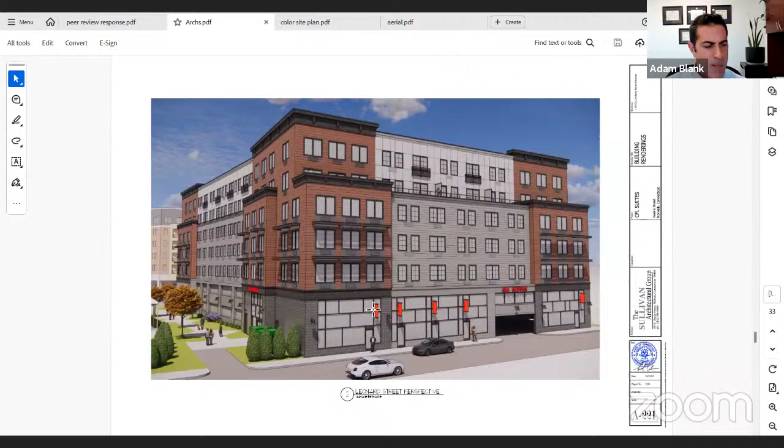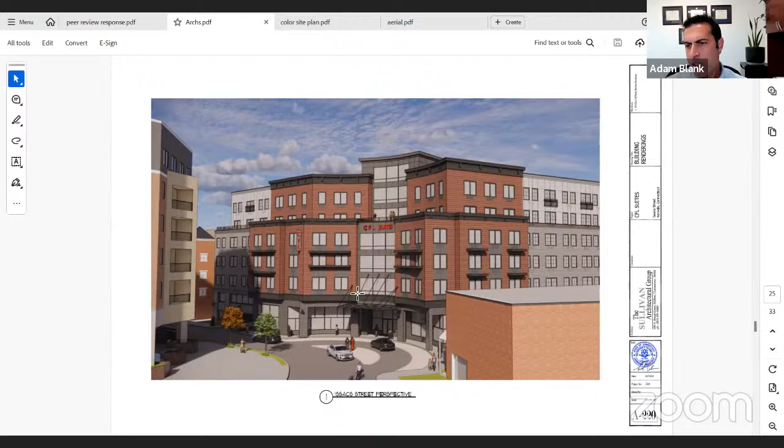As you've noted previously, Norwalk is short on hotels, so this fills a general need. The building itself is proposed with a fairly few amount of amenities, with the idea being to get guests out into the neighborhood, supporting local businesses, which we think is great for the neighborhood in general. And Mr. Milligan has interest in other properties along the area that hopefully this will help support, getting his other tenants out to those restaurants and retailers.

We think it's a significant improvement for the neighborhood. As I mentioned, the existing site is pretty much entirely asphalt, impervious, not a lot of green. It will be increased from about 0.5% pervious currently to about 20% after we're done, including about 36 drainage galleries for water retention and stormwater treatment that currently don't exist. The structure proposed would be LEED Silver certifiable, with a whole bunch of other sustainability improvements proposed for the site.

With the addition, of course, new landscaping will come around the sides of the building on this side and down here.

We're in the CD4 for planning and zoning. It's a site plan - these are all permitted as of right uses under the zoning regulations. So your role in the process is limited, but important, and that's to determine whether what's being proposed complies with your design review guidelines. They really are your guidelines, and they have some flexibility for you.

You've retained Bob - I'll say Bob G, because I butcher his last name every time - from DeCarlo and Doll to do a peer review on the architecturals for compliance. We started working with Bob, and really with planning and zoning and with redevelopment, almost 4 months ago on this project. There've been quite a bit of back and forth, and our original plans were modified fairly substantially along the way, based on feedback we received about design review standards, zoning compliance, and architectural preference.

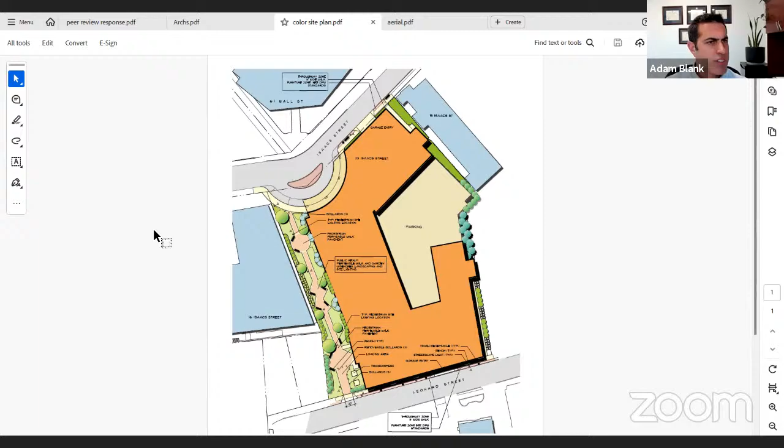With that, let me stop sharing. I'll have Ray take 2 or 3 minutes to show the architectural plans, and then if it's okay with you all, we'll pull up our response to Bob's review and run through the handful of items that remain outstanding. But if you have other questions or concerns that either I haven't addressed yet or that Ray doesn't address, please shout them out at any time.

With that, Ray - okay, thanks. So I'm going to share my screen. Hopefully everybody can see that now. What I'd like to do is briefly discuss the concept of the plan, how the building design and the site plan evolved.

When Jason first came to me and we looked at the property, I felt that Isaacs Street was a little tired, a secondary street - there wasn't a lot of definition to it. My initial reaction was I wanted to create a sense of arrival there. If you pull down Isaacs Street, I wanted you to be able to get to this building and feel like you got somewhere, like you arrived.

So we actually envisioned a roundabout here, but the only thing we can control is our own property. So we've got ourselves kind of a three-quarter roundabout on Isaacs Street, in which case we can turn around and go back out. We've got drop-off areas for the extended stay.

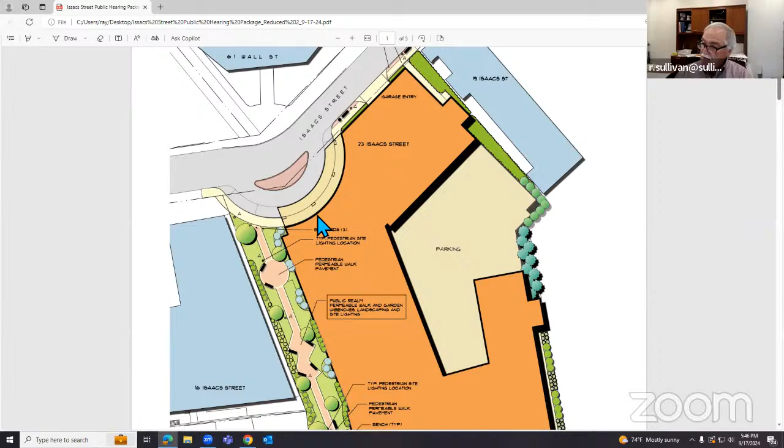Thanks, Adam. So as we turn to the elevations, if we look at the Isaacs Street elevation, this shape helped create our building frontage. Here's the main building frontage with the main entrance and the partial roundabout. The main entrance we saw as the focal point - it was the front of the building, and it was reflective of the curve.

The focal point actually aligns with an existing areaway that walks out between 61 Wall Street and the theater to get out to Wall Street. We have visions of how that works in the future too. The elevators in the building are positioned so that every time the door opens, you look out these stacked lobbies, out that vista way, towards Wall Street and towards Norwalk.

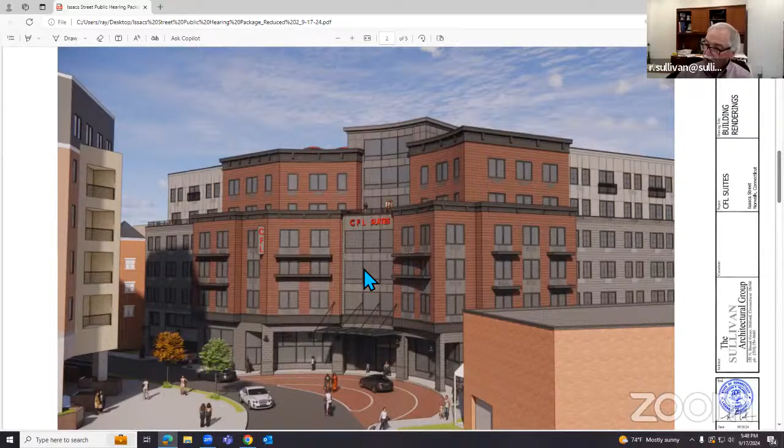I think this curved shape helped define the building, helped define the basic design, and enhances Jason's view of really wanting to pull Norwalk together down here. He's got other properties he'd like to see developed. There's a lot of activity coming online down here, and we saw this as creating a nice sense of place, a focal point back on this somewhat secondary street.

The westerly elevation and plan is formed by this public amenity space. This public amenity area exceeds 26 feet in width, and it's filled with paver walkway, landscaping, benches, and lighting. It really creates a nice sense of space here, and allows 16 Isaacs to maintain a frontage.

Typically, we didn't need to build this curve up here - we could have come across and right down the property line here. But again, as neighbors, we didn't think that was the right thing to do. I would never put the building all the way to the property line anyway. If I did anything, I would have held it 10 feet back, so we can create proper light and ventilation up in the building, which needs to be a certain distance off the property line. But in the end, Jason saw this as being the right thing to do for the neighborhood. It creates this really nice exterior space for the users of 23 Isaacs Street as well as for the public.

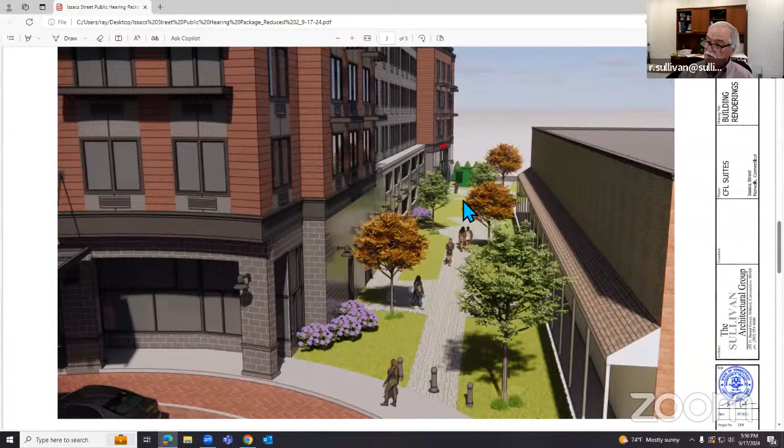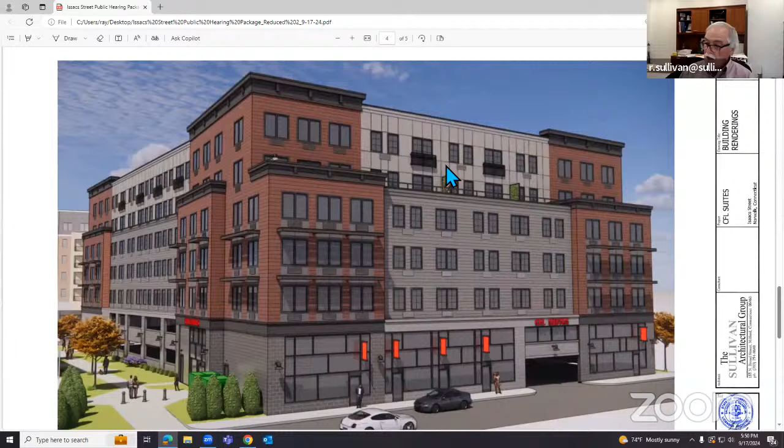So quickly, the Leonard Street elevation - it creates, with the live workspaces, street front activity, and brings the building right to the street.

This elevation is a little bit simpler than the other because it's a straight line, and we've got these more contemporary, deeper colored bookends framing the center of the building, which is slightly less colored, a little less contemporary, trying to create a separate look on the building.

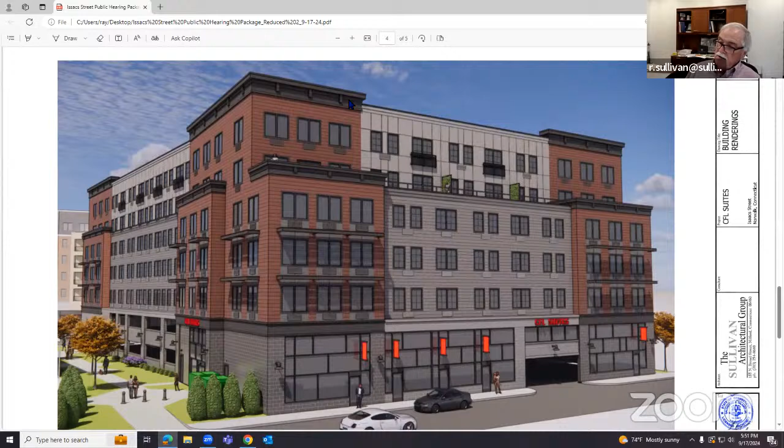We also create access into the parking garage back here. The other noteworthy point is that this southwest corner is actually what we feel is a nice, dynamic shape.

It's a piece of the building you'll be able to see from vantage points driving down West Avenue. You won't see the whole thing all the time, but when you drive down West Avenue and go between pockets of buildings, you'll see that shape back there. We're hopeful it creates interest and draws people back to this area.

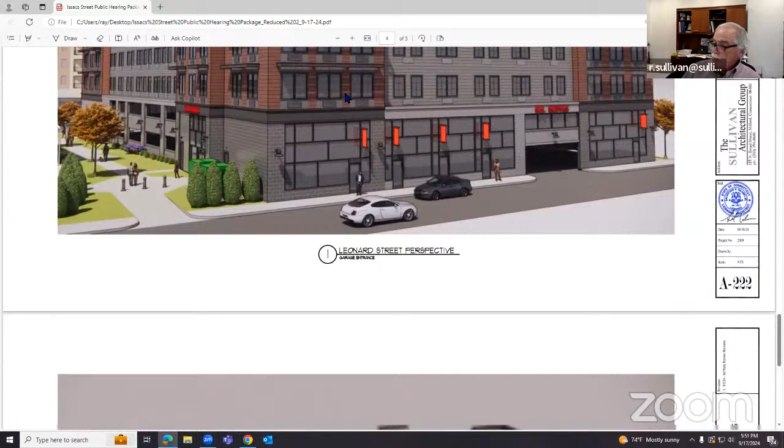Here's the aerial view with the partial turnaround and the public realm. Leonard Street is back here. We have a substantial number of solar panels on the roof, and a rooftop amenity area for the building users. As required, from the fourth floor up, the building steps back 10 feet, both along here and back on Leonard Street.

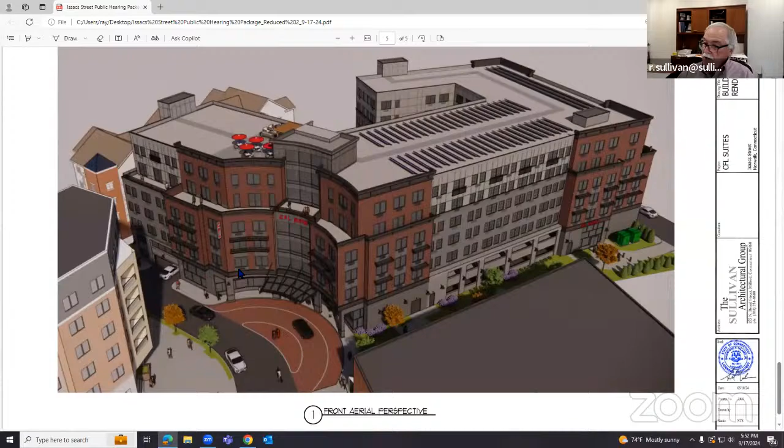The building has 5 residential floors with 42 units on each floor. Maybe I'll just go to a floor plan that might make it a little easier to understand this.

Here's the typical floor plan. There are 42 units on each floor. About half of them, down to unit 224, are smaller units averaging between 425 and 475 square feet. From unit 225 back to 242, they tend to be larger, ranging as low as 675 square feet all the way up to 960, with maybe one odd size a little bigger than that.

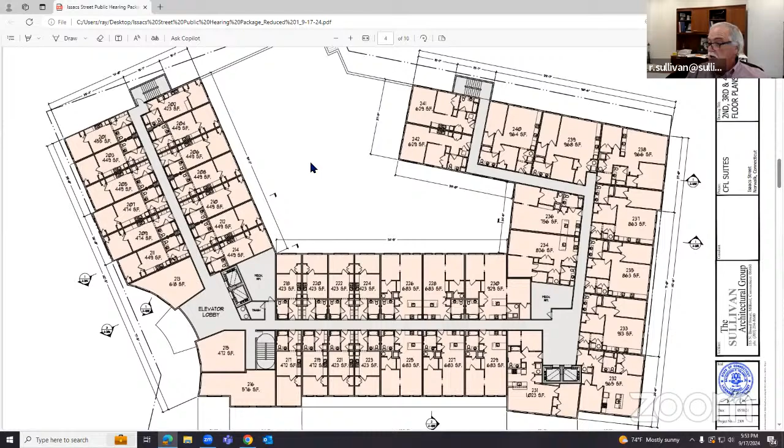For parking, there are 2 levels with 163 parking spaces in the garage, plus 4 outside. So that, by way of brief overview, is the building.

Here are the setbacks. Should I turn it back to you, or do we want to go deeper into it? No, unless the commissioners want to hear more about the layouts, but let's turn it back over and hit a few of the points Bob raised, since he hasn't presented yet.

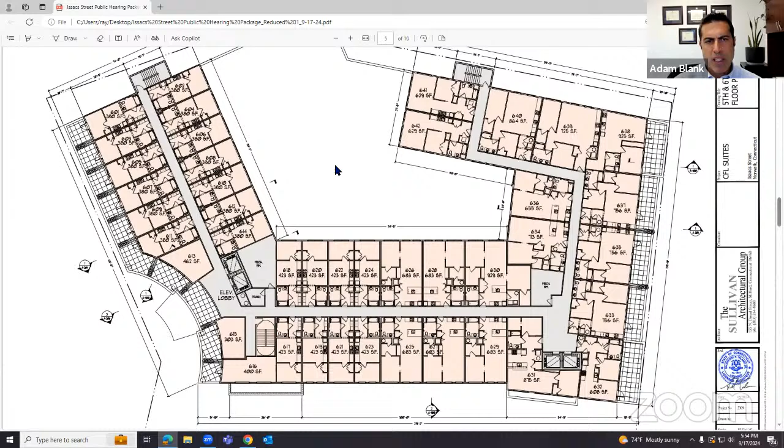Okay, I can share my screen and go through the issues that he's raised. Is that okay, Mr. Chairman? It is. Okay.

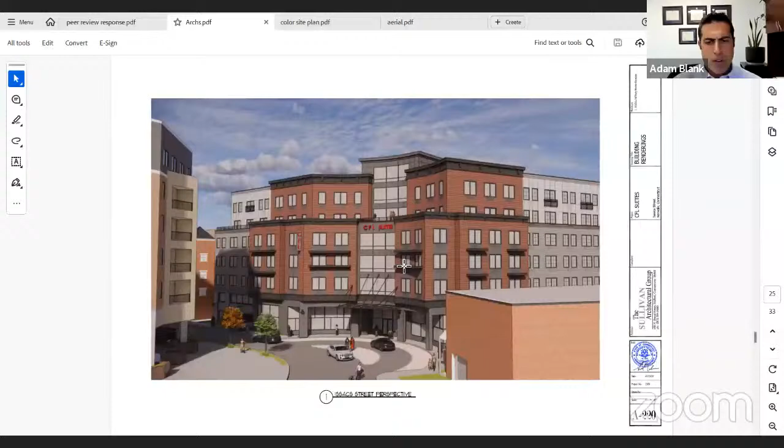I have one question. The building next to you, across from that walkway, I believe that's Audiotronics, is it not? Yes. And their frontage will be on the walkway? Let me try to find a better view. Yes, their frontage is on the walkway. They've got a covered walkway along the front. And where is parking for them, will it be behind your building?

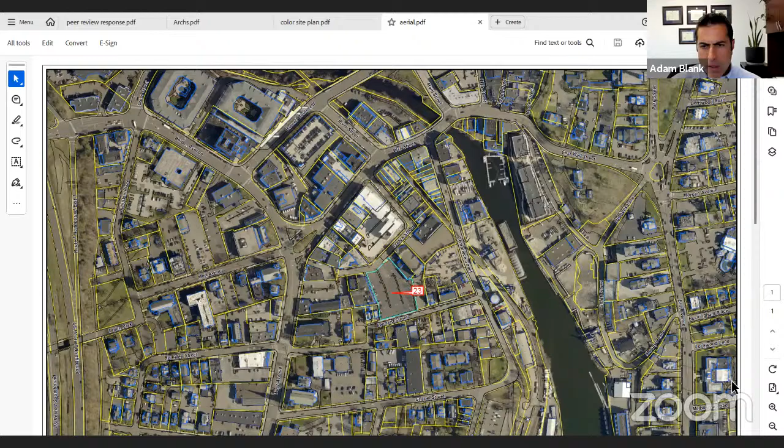Let's zoom in from here. So the parking, that's not actually their frontage. Their frontage is on Isaacs. This is the building's frontage. Their frontage is here, and they've got some loading and spaces back here. I don't know how the leases spell out what gets used for whom, but this is their area essentially back here. To the extent we have public parking here, or other places for public parking, that's where they can park.

The underground parking is there as well. Yep, they're back here. Okay.

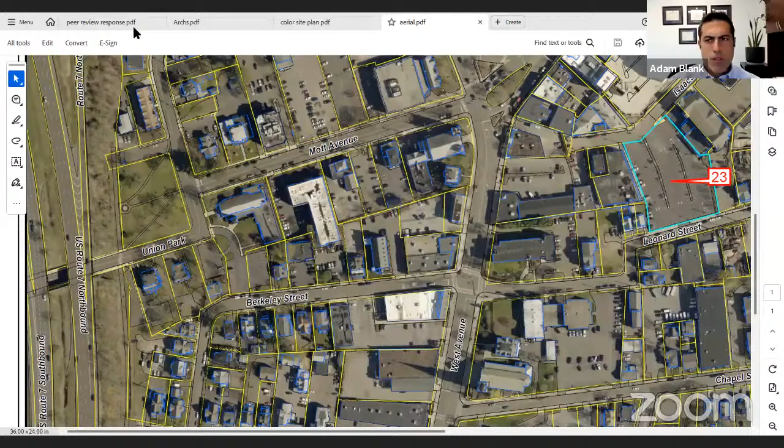All right, let me just pull this up. I'm going to try to hit a few of these points. The peer reviewer asked if we could locate the building entry piers inboard of the inside curb edge and align the face of the building above with the outside face of the piers below. Ray, can I stop sharing so you can pull that up and explain why we've done it the way we have?

Sure. So we have this lobby frontage here, a sidewalk, and then piers along here. This face of the building aligns perfectly with the line of the columns. We have a slight projection here and here, slightly less than 2 feet, that go out beyond the column, and the column is actually right on the edge of the curb, so it doesn't interfere with parking. We like the slight projection here and here because it helps accentuate the center of the building.

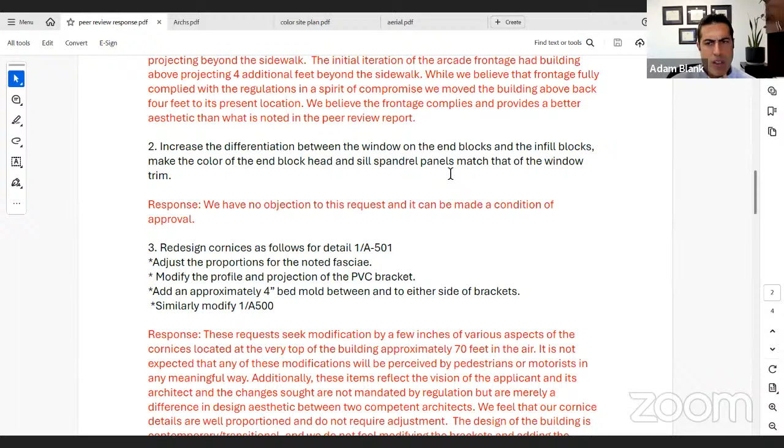So then we were asked to increase the differentiation between the window end blocks and the infill blocks, which we have no objection to doing.

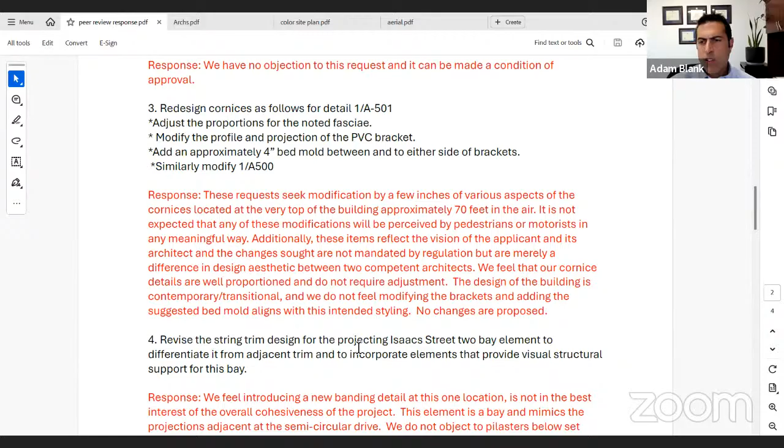Then the next one was redesigning the cornices in a small fashion. So these are up at the top of the building. I'll let Ray pull it up. As Ray's pulling up the cornices, keep in mind that what we're talking about are inches of detail, 70 feet above the ground, and I think they're going to be hard to discern from what's been proposed. But Ray, you want to pull it up and share? Yes.

So your previous comment, Adam, was that Bob had suggested that these infill panels here, in this redwood color theme, be a darker color, and so we've actually changed that. We haven't sent that to Bob yet, but we've made the change per his request.

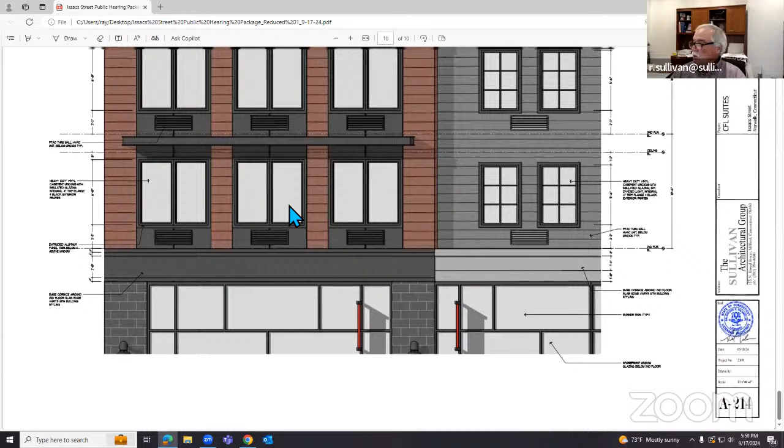And then when we talk about some of the cornices and whatnot, I think we have a fairly healthy cornice up here, made up of bent metal trim, sitting on real trim and brackets. We've had that more demonstrated on the more contemporary edges of the building, and it becomes a little simpler on the simpler sections of the building.

This particular section is actually 4 feet 5 inches tall, so it's pretty substantial. This one's a little less, more like 2 feet 6 inches. Bob had some recommendations about changing dimensions, and possibly adding some molding trims up in here. But we thought that because of the contemporary nature of the design, we'd rather keep it simpler, with straighter and cleaner lines.

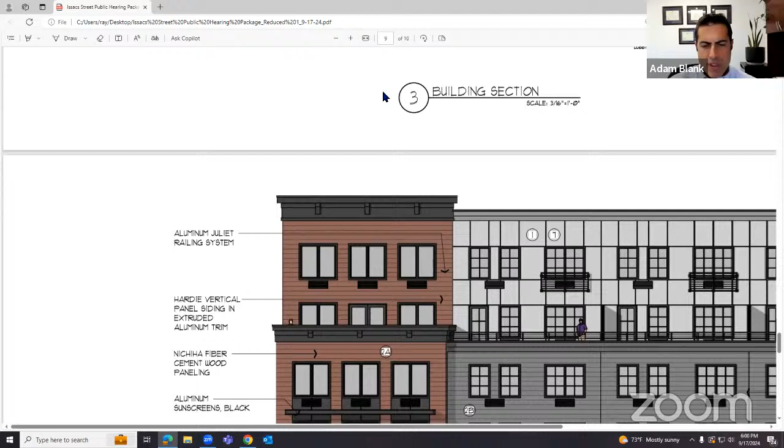Revise the string trim design, projecting the Isaacs Street 2-bay element to differentiate it from adjacent trim. Ray, can you? Yeah, I'm in the process of doing that.

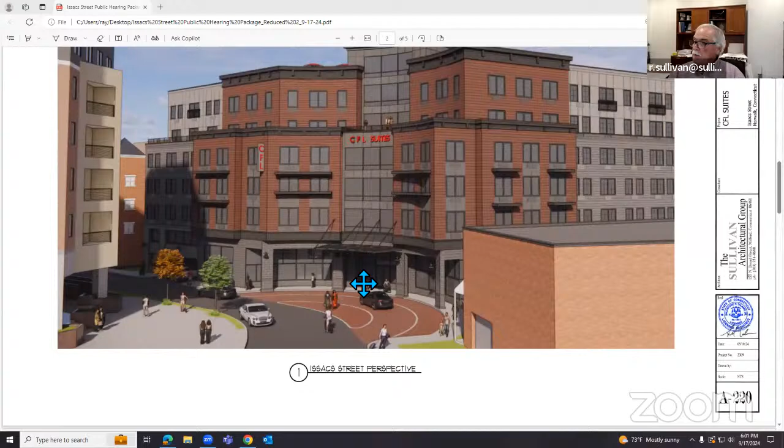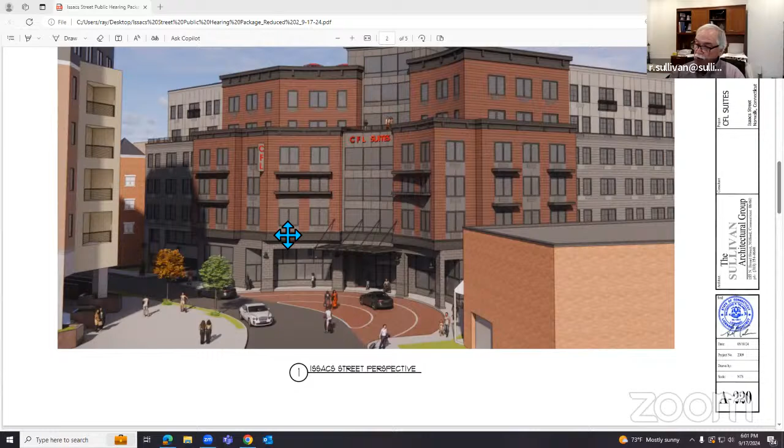So what we find all the way around the building is a pretty definitive line where the first floor meets the second floor, where the fourth floor meets the fifth floor, or where the building meets the parapet roof. That's a pretty significant dimension, a little over 3 feet thick, and we like that. We don't want to break the plane of that band around the building.

There's a fair amount of movement on the building. This projects out, comes back, comes around the curve, works its way down the end of the building. As it goes from the deeper color section to the lighter color section, the band changes a little, but stays in the same plane. Much the way up here we've got this band transition to a smaller, more delicate band here or here. But we do like the band to stay in alignment. That would be our preference.

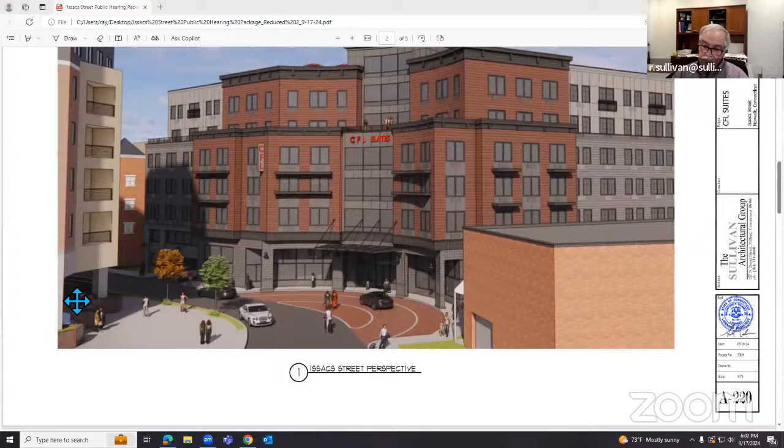The zoning regs, and by the way, some of these that we're running through, it's a joint review between planning and zoning and redevelopment. You've both used Bob as the peer reviewer, so his comments, some relate to zoning concerns and some relate to design review guidelines.

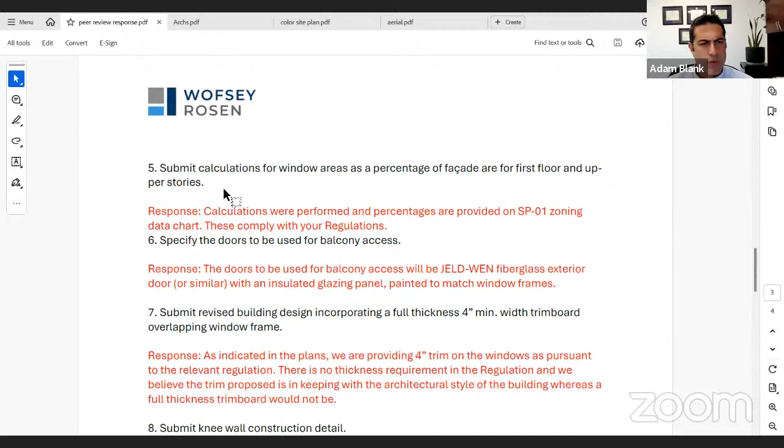One of his concerns was about calculations for window area as a percentage of facade. We did perform those and provide those, and it complies with the zoning regs. He also asked that we specify doors to be used for balcony access. We've now specified the doors or similar that will be used.

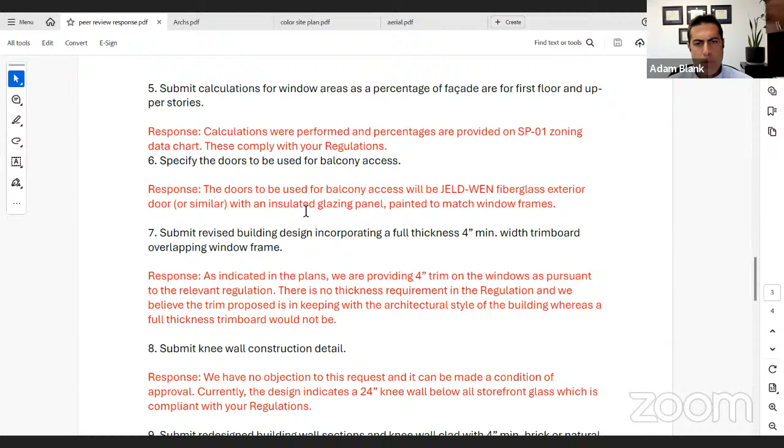Then the next one is submit revised designs incorporating a full thickness 4-inch minimum width trim board overlapping a window frame, and that relates to a zoning regulation that asks for 4-inch trim being provided. So can you, Ray, or Jason, answer this? Yeah, I can take this, at first anyway.

This particular window is in Willard Place, over in Norwalk. It's a heavily reinforced fiberglass window, extremely sturdy.

The extrusion on the sides, top and bottom, are just shy of 3.5 inches. It provides a sturdy frame on the building, which is what the window trim is trying to do. The good part is it's integral. If you put up trim, the joints can move a little and take maintenance, but in this case it's all one product.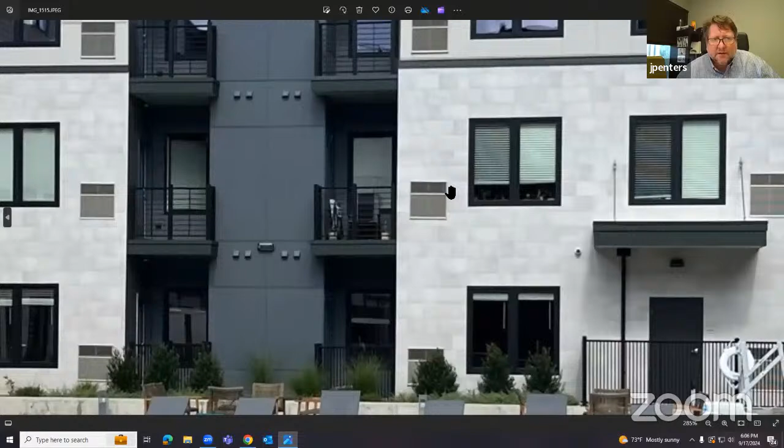Using these, it basically already has a trim, so it's very difficult to say you're going to add another piece of trim around trim that already exists. It's essentially a window, because they're casements, that already comes trimmed. So the regulation becomes very—I don't want to say it wasn't completely thought out, but with this type of window it doesn't really work.

Since we're here and showing this, I'll show the exact language that was raised, dealt with in the design standards, but certainly in the zoning regs, which talks about materials to be used.

One of the materials we're proposing in addition to these windows is porcelain. Do you want to talk, Jason or Ray, about the porcelain we're proposing? I'll quickly talk about it, and Jason is actually maintaining it, so he knows more about it than I do.

In Willard, this is a porcelain tile, the same type of tile we're talking about using. One thing to know about the tile is that it's adhered with a metal mesh and a mortar, so it is securely attached to the substrate. A lot of our building on the lower level, at Isaac Street, is concrete. Some of it's going to be steel stud. It's all going to be non-combustible.

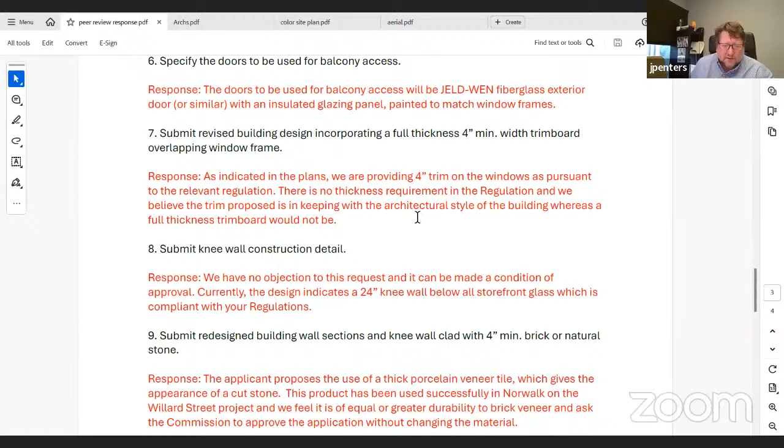Our first thoughts were to use masonry block, some sort of textured block or something, but those blocks are hollow, and if they get hit, it's a big disaster. So when we found this, which is actually imported from Poland, we were just blown away by the product, and we put it everywhere we thought there might be contact.

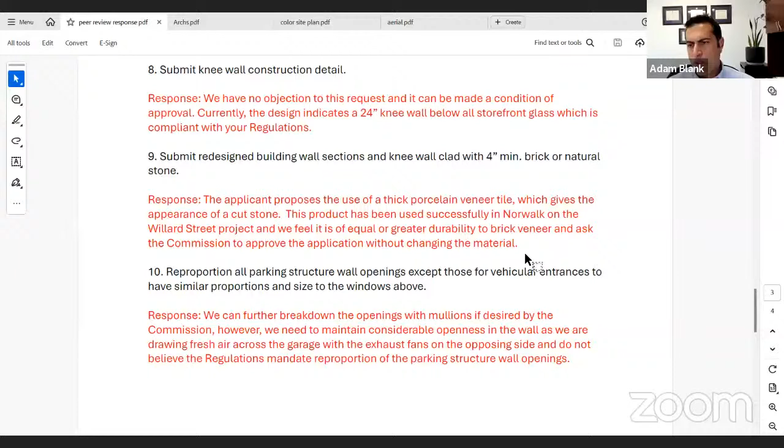All right, so number 8 on here was submit knee wall construction detail, which was fine for us to do. Number 9 was asking for 4-inch brick or natural stone. Again, I think you just heard about the porcelain that we're proposing. 10, and I think there's only a few more coming down the list. 10 was reproportion all parking structure wall openings, except those for vehicular entrances, to have similar proportions and size windows to above.

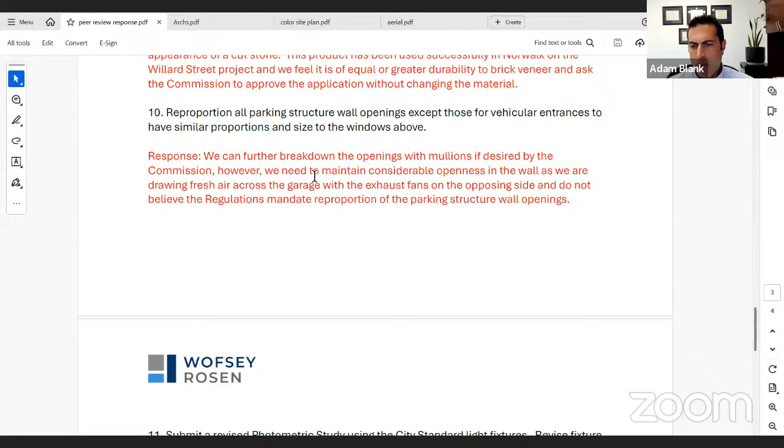Ray, you want to just talk about the entrances for a minute? All parking structure wall openings - oh, that was more about the alignment of the piers and the openings up above. Actually, this is the last one, the rest of them we agree on.

The file's so big, I had to split it up, so I've just gotta. Can I just ask a question while you're doing that?

Is the intent to use the porcelain tile over the entire building, in just different colors, or are there different materials? I couldn't really tell. No, it's just at the base. There's different materials all over the place. You're using brick above? No, actually a cementitious Nichiha product up above, and there's a Hardie product up above as well. I've used all of these materials in the last 3 jobs I've done. They're fantastic materials.

So the porcelain is only on the base, along the base, yeah. It's a darker gray porcelain than what I used at Willard, but it's the same product. Okay, thank you. Yeah, that's down here.

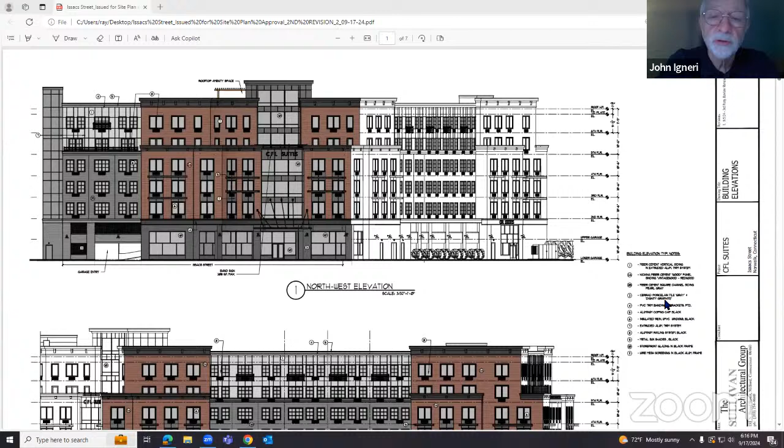All right. Can I ask, the parking garage is supposed to have something like, I'm not sure the exact number, 88 parking spaces that are open to the public, available exclusively for the public, I think it says. Can we see, or do your drawings show how the public would enter the parking lot and walk out? Is there walkways and so forth for them to do that?

You're gonna go through it, right? There's a whole bunch of entrance and exits. Will they go through the building, or will they have it? So this is the entrance off of Isaac, and you can pull down and pull out onto Leonard. It's a 2-way passage, so you can go either way, or you could pull straight in and go up to the upper level.

So if you do pull in and you are parking in this area, you can get over to, let's say, the building lobby here. You can go through the lobby, or you've got this access way to walk all the way out, across the drive aisle and get out of the building.

If you're parked down in this area, this is that secondary lobby that's down in the back. So you can walk your way over to that lobby, go through that, and then out into the general public.

There are these 80 spaces here, with 4 in front, and again you can take this ramp and go up to the second level, where there is parking. We've got kind of the same circulation here - you can get to the stair and go down to that same opening, get into that lobby area and go down through that same circulation path, or go into the second level of the lobby.

So someone going to a restaurant on Wall Street wants to park here - do they have to go through the hotel or extended living quarters? No, there are several ways for them to get out.

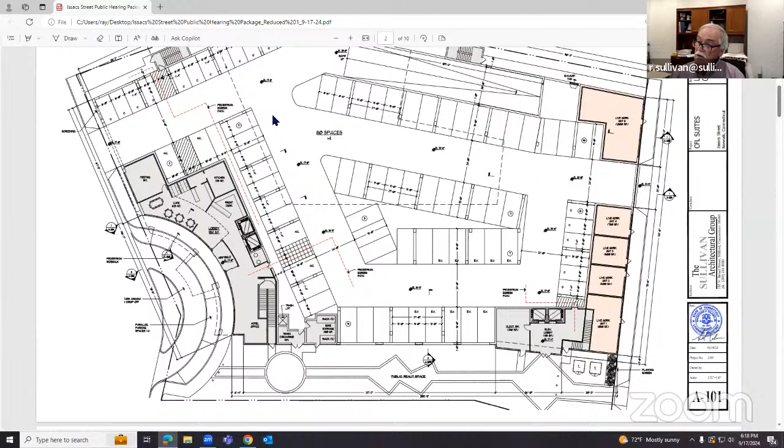So if you came in and found a space right here, you would just walk from your space and go through the lobby out. And if you had a space here and you weren't going to the hotel, you can walk across the drive aisle and exit the building there. You can also walk down the drive aisles - that's really not preferred, but you can get there.

Thank you. So I think - and anybody on the team jump in - but I think we covered what we wanted to cover on that relates to the design review. Unless there's questions, we'll turn it back to you guys. Yeah, I think we'll give it over to Bob Griswold so he could present on his findings and any outstanding items. Bob, if you want to share the screen or have any remarks.

I think you might be on mute, Bob. Okay, there you go. Okay, I'm okay now.

Could you also pull up the appendix of the design review report? Because there's a useful piece of information in there. Let's go back to the first page, please.

So the important thing here is, first of all, that the items that are still up in the air are essentially aesthetic, or maybe documentary, but nothing that affects the functionality of the building. So that's important to understand.

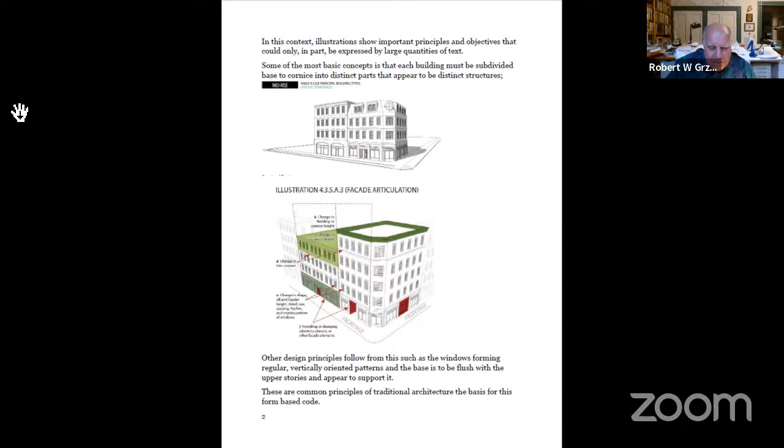One of the basic things in the new zoning and redevelopment design guidelines is that the appearance of a larger building should be broken up into what appear to be smaller buildings. That break should be at every level of the building, so you don't think there's a base that some things are just stuck on top of. This is going to take some getting used to for our architects on these projects, but that's clearly what's intended.

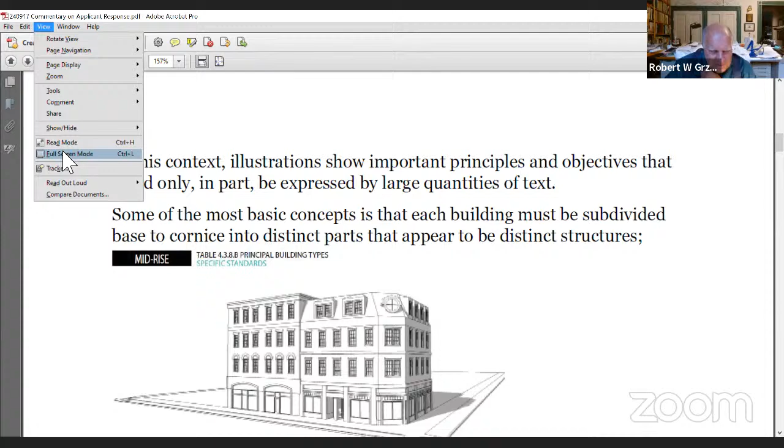So for the first point, the arcade. What's also new compared to what we have now in zoning is that we have a lot of illustrations, and you cannot ignore the illustrations. They are equally important, if not quite as elaborated as the wording of zoning.

So when we come to the arcade, you see two things. One, the columns defining the arcade are pulled back some distance from the curb. Why would you do that? So you can't hit the columns maneuvering a car, or if you're opening a door, you can't hit them. What dimension that should be, I don't know, but it should at least be at the inside edge of the curb.

The second thing you're seeing is that the columns align with the building face above. The building face doesn't project, but it's essentially a solid that has been carved out with this arcade. I take that as being exactly what is intended as the design in the whole city. Next page, please.

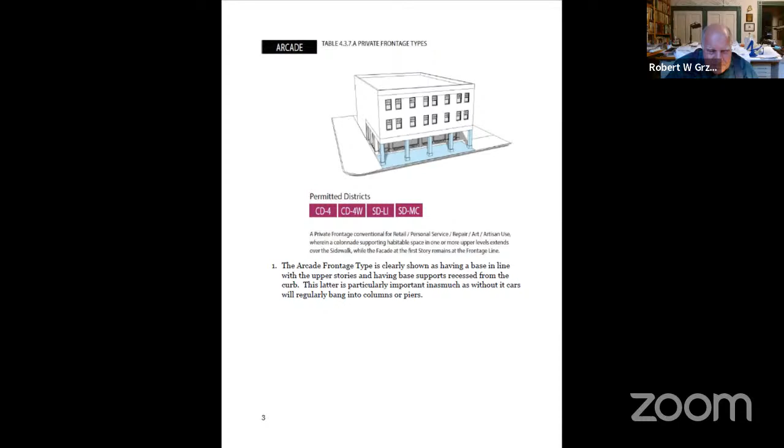So number 3, the cornices. For a traditional building, the cornices are the single most important element that defines its character. You can't say it's up in the air, that it doesn't matter. You can look at Greek architecture, Roman architecture, neoclassical architecture—they all put considerable effort into visual refinement of those cornices. I think that's certainly appropriate here.

Let's go to the next page. Okay, so we've got two images here. This is a little out of order, but the material used above the first level of 21-23 Isaacs is essentially a clapboard. It might have a different profile, but essentially it's a neutral, functional, utilitarian envelope. We've seen these all throughout New England, and it's perfectly fine as long as you have an entrance that gives definition and detail, as long as you have casings around the windows, and as long as you have a cornice. This is a very ordinary house, and it happens to have a nice entry, but it's saying those elements are important.

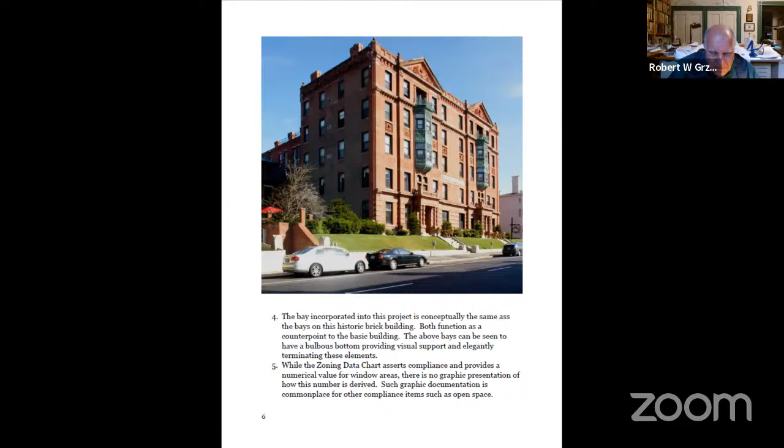Now, window casings. I'm sure those are wonderful windows, and I have no problem with the windows themselves, but you may remember, in both the redevelopment guidelines and now in zoning, there's the principle of rendering in texture and depth. If you just put a window in a flat plane with a flat piece of casing, you're not rendering texture and depth. You can take those windows and add trim, recess the window a little bit, start getting some life into the facade. These are two pictures right out of the zoning as examples of what's expected for things like window trim. If you don't do this, you're not going to get the cohesive environment you're looking for.

Okay, let's see. Okay, cladding.

Can we go to the addendum, Brian? I think John might be controlling that screen. John, do you have it? From the original report, the final report? Bob? Yes, yes, I'm sorry, yes. Yeah, give me a minute.

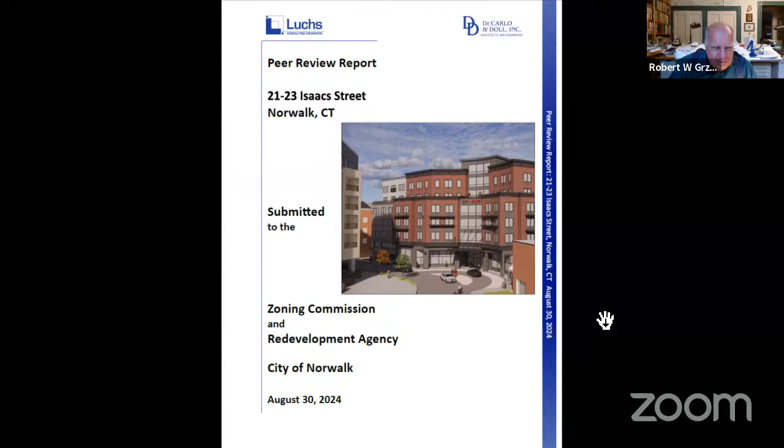Okay, so let's go to the second from last page. There we go. Okay, so this building has brick and not real stone, but cast stone. It's a hotel, a Hampton Inn. Like I say, I can afford to stay there, so that tells you it's very modest. But it has a lot of that richness.

If you go back to the previous page, I think it's the previous page. No? Okay, let's go two forward, please.

Okay, now look at how much you can get in four inches of masonry, and I would say that cast stone is absolutely equal to stone and could be added to zoning as appropriate. Look at that cornice or string course on the lower right and compare it to an early 20th century cornice door head from a building here in New Haven. You can do so much with these materials if you just say it's an extrusion. You can do anything with an extrusion. You just have to work at it just a little bit.

So no, I don't accept the idea that the porcelain panels will be good for Norwalk, even if they are utilitarian in the uses that they've been put. Now, I think there's one more point on that first document. I don't even remember what it is now. Oh, parking, yes.

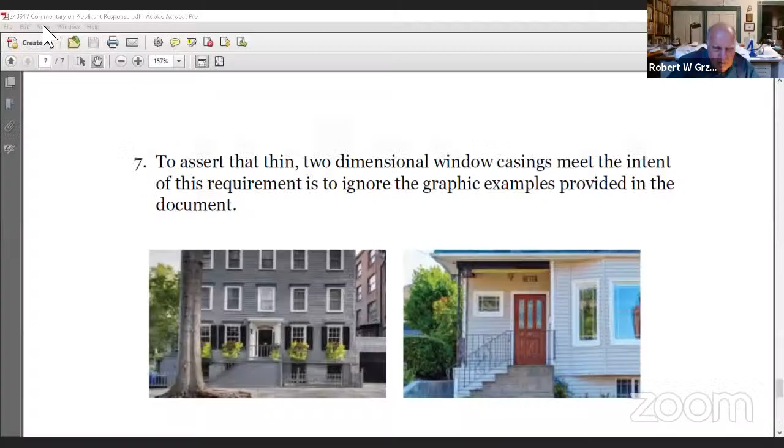Okay, so next page. Okay, so the final point is parking. And the key here is that, and I think everybody agrees, zoning says that parking structures are supposed to be wrapped with a liner building to hide the parking. We don't have that consistently on this building.

So how do you approximate that? The proposal is that it's approximated by a screen wall that continues the opening pattern of whatever is above down to those first parking levels. So that at least it doesn't look like a parking garage, because that's, I think, the real intention behind this—parking garages are made to be not seen or heard. So there is the summary of the report. And if there are any questions, commissioners.

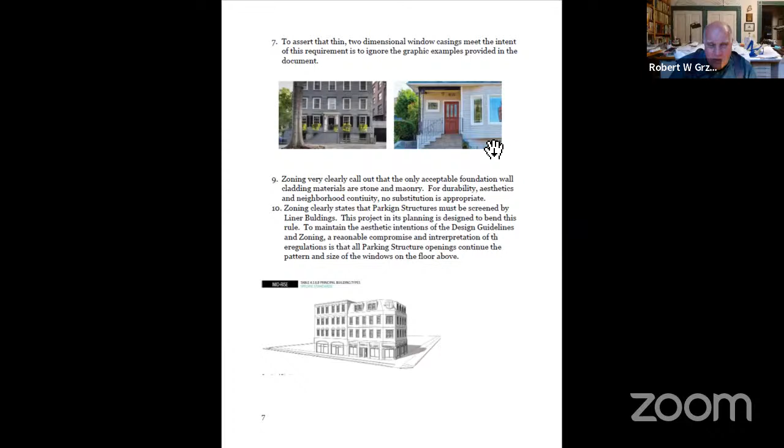I hope. I have a question. Is that okay? Sure. So I don't know if you remember from the last time we met, Bob. I'm an architect as well. I didn't know that. I am. I just am more in real estate development these days.

I do not read anywhere in the zoning regulations where it says that every building now has to be classical. So a lot of your comments I find relate back to details and thoughts on classical architecture, and to me that is eliminating modern architecture. I think that is not good for Norwalk, and I don't think that's the interpretation of zoning, that every single new building in Norwalk is going to look like each other because they have to use the exact same things. So I'm just concerned because I don't understand reading anywhere that every detail has to be classical, everything has to be referenced back to the classical, et cetera. So that would be just my one comment. I think I made it before, but I'm saying it out loud now.

So I'm not sure if you want to respond, but that's just how I feel about many of the comments as you point back to classical detailing. Well, I would say that...